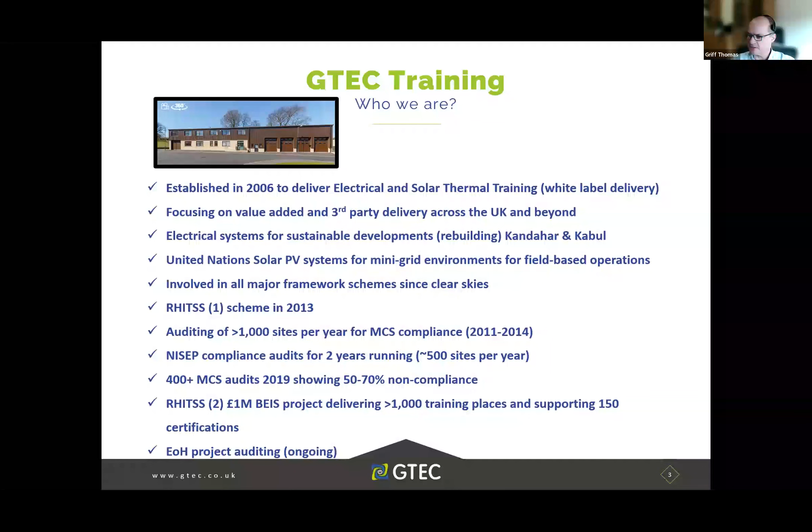And we've also been very heavily involved in standards and compliance. So pretty much all of the national standards that are used at the moment for the deployment of these technologies are those that I've either personally written or have been written by a group working alongside me. So the very first national standard for solar PV was one I produced in 2012 with a colleague up in Penrith. So we flew the Northern Flag all the way down to whatever it was, DTI, I think possibly then, or DECC.

We work very closely alongside government policy, government agencies, so we get a lot of good insights from that work as well. I'll let you read up and pick up on some of that stuff. Still very heavily involved in standards, and I sit on a couple of national and worldwide committees for solar PV and energy storage currently as well.

So what Kate asked me to do is to give a bit of a highlight over heat pump deployment challenges, etc. And it's actually a number that we don't hear a lot anymore, mainly, frankly, because Boris got a little bit embarrassed by it, but also because the new government hasn't quite decided if it's realistic. I can tell you now it's not, but bandied around a few years ago, there was a target of delivering 600,000 heat pump installs by 2028, which is just an absolutely colossal number of heat pump installs.

I don't quite know what everybody wants to know, so I've picked out a few key points from a few key areas and I'm happy to dive into that on Q&A afterwards. But what I wanted to highlight is this term rapid transition, which sounds really corporate, right? But we've done such a lot of this stuff over the years. Take inside toilets: in 1967, 25% of homes in the UK had no inside loo. Now, if there weren't two inside a property you're moving into, you'd be going, oh, there's only one toilet, and you'd be thinking about putting another one in.

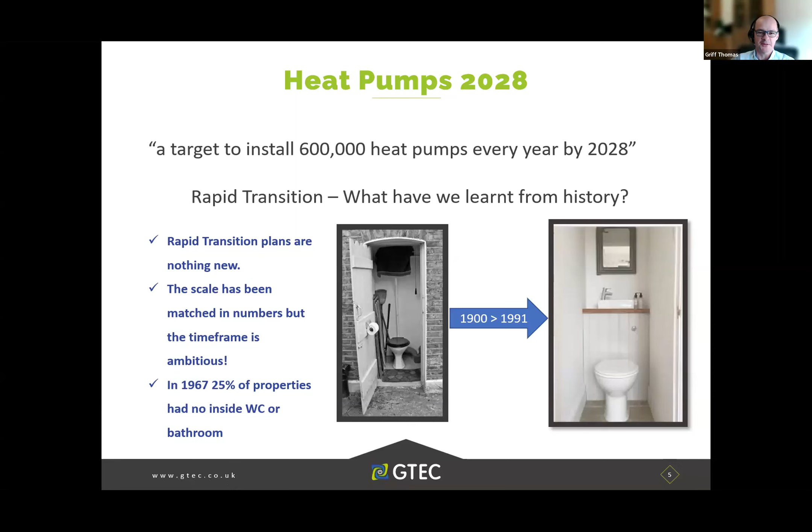So really interesting that we shouldn't categorize all this incredible amount of hard work we've got to do to get that consumer buy-in as though it's something that's never been done before. We have, and we've done it loads of times. We've just done it with different things. And that's a really important thing I want to sort of draw out.

So other examples, gas central heating. I can remember not having any gas central heating or any central heating at all, in fact. But again, nowadays we just expect it as a norm. And it's very much about looking at that, looking at fitted kitchens. We never used to have fitted kitchens, but now we expect it as a norm. And the summary of that is that our expectations, our demands, our consumer expectations of all sorts of things within the home have changed.

And nobody ever considers payback on those things, which really gets me, because loads of people talk, what's the payback on a heat pump? What's the payback on this? Well, it's a means of heating the home. I absolutely understand there's a big capital cost for most people, but again, we need to try and flip that mindset into a why wouldn't we instead of why would we? And that's a really difficult social challenge. I get that, but if we don't, it could be tricky.

And again, it's a social norm. Going back to 2010 and 2011, if you drove down the street and saw solar on the roof, you would probably stop and look up and go, oh, what's that eco bling on that roof? Whereas now it's everywhere all around the country, and we just accept it as a social norm, in the same way as if you flew over to Turkey or Spain and you see all the big solar thermal plants on top of the various buildings and blocks of flats out there. We just expect it's ordinary.

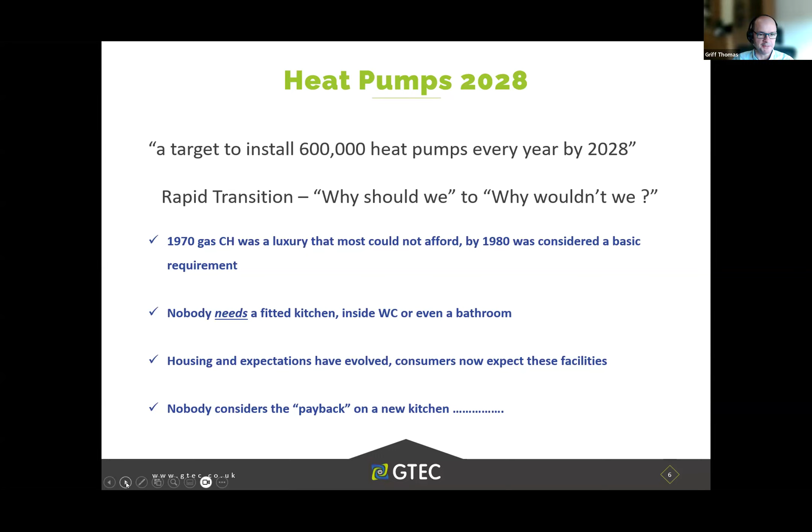And I guess one particularly for this group as well is about the visual impact of heat pumps, especially. And the bit that I always home in on is, do we remember when we didn't have 17,000 different types of recycling bins outside our doorsteps? Because that's a really big social change, to go from having one bin to having multiple. I don't know how many there are in your areas, but you'll certainly have 2 or 3, I would imagine, if not more. And having all of those stacked up outside the house, we've just become accustomed to, and that's our expectation. So yeah, the question is, why wouldn't we install a heat pump?

And I guess the most recent one that we all will be aware of is the transition to LED lighting, where 10 or 12 years ago, LEDs were very poor, they were very expensive, not a lot of people were using them. Whereas now you pretty much can't buy anything apart from an LED lamp. And that's a really rapid shift in 10 years practically. So we shouldn't be too upset that it's taking a little while to get to 600,000 heat pumps by 2028. That's not going to happen.

So think about it. Why wouldn't we have an inside loo? That's the sort of comparators we've got to give, and somebody's paying for that. Somebody pays to have the inside loo, directly or indirectly. When you buy a house, when you're retrofitting a home, somebody's physically chosen to do that. So a few little bits and pieces about the social challenges, because I thought that might be quite an interesting set of topics to go around.

There's a very common misconception, I feel, about heat pumps being noisy. I noted a few people, I think it was Frank, talking about oil in Hovingham. Almost every heat pump now available on the market, the terminal noise, that's the velocity noise that we hear from the fan moving, assuming it's been installed correctly, is actually technically less noise than a fan-assisted oil boiler flue, and probably less noise than an older conventional gas boiler flue. There's no other way of getting people to realize that without seeing it, feeling it, touching it, and actually getting in front of one while it's running.

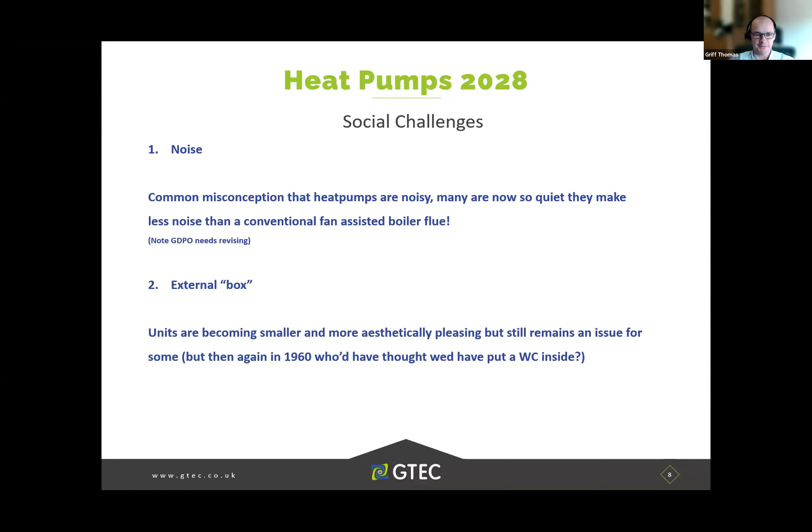External box, so that's a bit I touched on before about this aesthetic look. You know, again, going back 10, 15 years, they looked very, very box-shaped, weren't very nice looking. Yes, I also understand that some of the more modern units, if you look at the Octopus Cosy 6 unit that looks a little bit like a pink salt bin, that may not be for everybody, but manufacturers are working quite hard to make them look acceptable to people as well.

Well, one of the biggest things that we come across with social challenges is disruption during installation. A lot of people make inquiries about heat pumps. So we were involved in the Department of Energy's deployment under something called the Electrification of Heat program. So that was 750 heat pumps installed for free across England and Scotland, I think it was. And we audited 242 of those. The biggest cause of dropout for engagement were people who, when they had the survey around, realized that there'd likely be a number of disruptions to their home, swapping out radiators, swapping out pipework, etc.

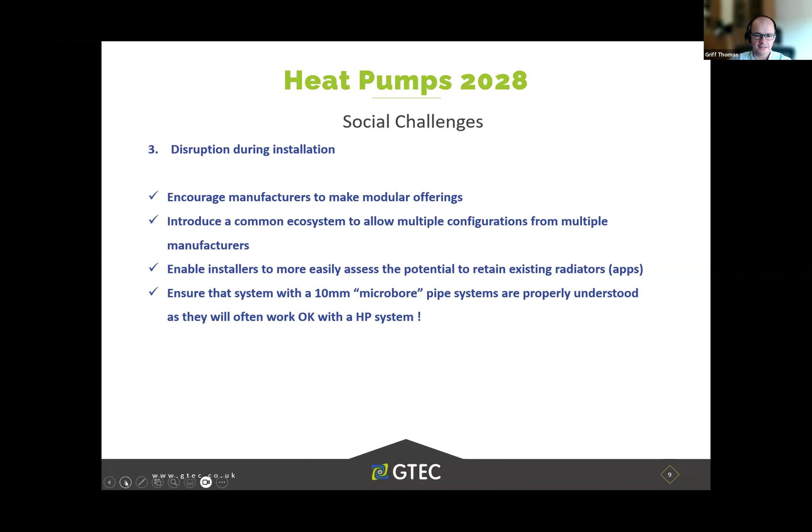Probably one for a deeper discussion, but I can absolutely categorically guarantee that the disruption that we are forced to accept at the moment is more down to the lack of technical ability of those doing the surveys and the designs of the systems, and wanting a very simple take-a-package-and-fit-it kind of approach, rather than doing some complicated maths to see what would work within the existing dwelling. So again, that's a time and education thing for the installers, the surveyors, the designers, but here at GTEC, we don't put that in a very high risk category at the moment, because we very much believe that will get flushed out in due course as people get better educated.

And then a little bit about how the heat pumps work. So I'm just going to throw this over mainly because if I keep talking like this, I'll run out. So does anybody just want to try and tell me what does a heat pump actually do? Anybody want to chip in? No. Nick's looking like he's leaning into the screen. I'm not looking for any complicated Carnot theory, mathematics or anything. Is it basically a fridge in reverse?

Yeah. Okay, so it's actually just a fridge, right? That's all it is. Forget the reverse bit. But the point to hone in on is that it does exactly what the name suggests, and it pumps heat. That's it. That's as much as you need to know and understand about it. It pumps heat from one place to another.

So taking the fridge example, I suspect, like me, some people on this call may be old enough to remember when you could see the sort of aluminium or stainless grill at the back of the fridge, actually inside the compartment. You don't tend to see them anymore. And then you've got the black grills at the back, which give off heat. That's a heat pump, right? So all it's doing is taking out the warmth from your sausage roll or whatever you put into that fridge, and it's absorbing it into that grill at the back, and it's pumping it out into the black grill at the very back of the heat pump.

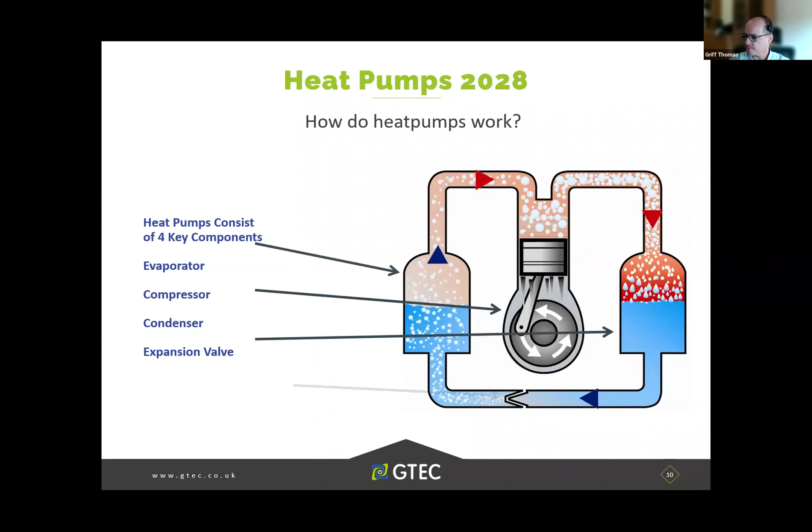So it is literally just pumping heat. What it looks like in a bit more detail is something like this. So we've got the compressor, which is that big black box. We've got low-grade heat coming in. Now, if that's ground source, that might come in from a loop of water going around the ground or in a vertical borehole. Or if it's air, it'll just be passed over the fins on the back of the heat pump.

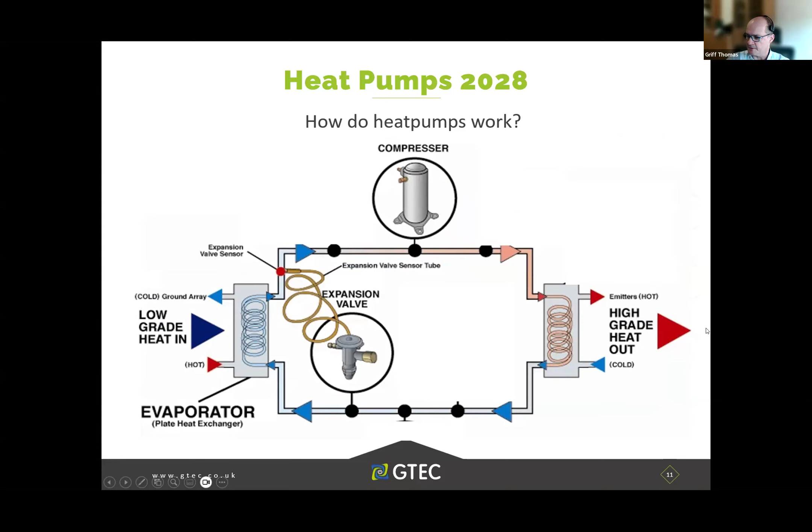And in there, that creates the boiling gas. The boiling gas now gets compressed. The compression goes over to this exchange part here, and that's when we go off to the emitters, the radiators, the underfloor in a home, and away we go. And it just carries on that cycle all day, every day. And that's sort of what it might look like in terms of a typical installation in a home.

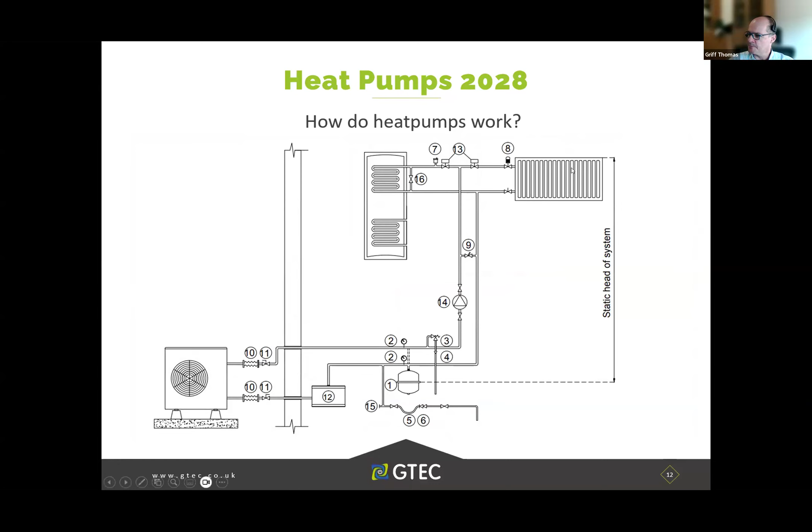And the bit that a lot of people get upset about, absolutely understandably, is the disruption around the pipework. You may be moving from a combi system onto having a cylinder, etc. We can't get away from some of that. Certainly the cylinder part, it's almost impossible to install a heat pump without requiring a cylinder. But there's a lot of work going on in radiators and piping to help get rid of that disruption.

And then another one, to kick some myths out, is the idea that radiators aren't really any good for heat pumps, which is completely fabricated. Again, it comes down to the maths, but there's a really interesting nuance that's happened over the last 20 years especially: when heating systems were originally sized and installed, you would end up with people who have the right size radiators, or actually usually slightly oversized.

And then as time's gone on and that home has become more energy efficient, so there's some insulation applied, maybe underfloor, maybe windows have been changed, maybe work done to seal up air gaps and drafts, what you find now is for a conventional fueled system, oil or gas, those radiators are far bigger than they need to be, and they'd work quite well with a heat pump.

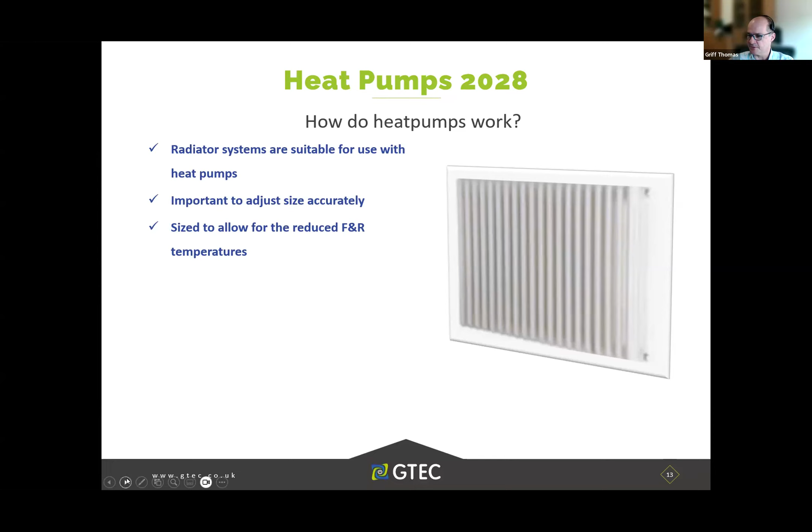But again, trying not to be too disingenuous to installers, that requires some maths, and a lot of them just prefer the option of coming along, replacing everything, and going from there, which isn't ideal for consumers, and we see probably a 70–75% dropout of consumers at that stage.

So then that moves us nicely into the technical challenges. And again, we're really blunt about this. There's no technical challenges at all.

I've designed systems with heat pumps that have gone into churches. Right? Churches aren't usually inherently the most insulated or airtight buildings, but absolutely anything is possible. But an interesting point here is about what we perceive to be efficient, because a lot of people talk about, is a heat pump efficient? Is it going to run efficiently? So I thought it'd be worthwhile just drilling into that a little bit.

And again, I don't know on the call whether anybody is sort of in this space, but is anybody able to guess a little bit about what the average efficiency is of a gas boiler? Anyone aware? 70%. 70 is, that's probably quite realistic, Chris. I'll be honest. Usually the government and co would have you believe it's kicking around 85–90%, but when you take into account how it's actually installed, yeah, 70–80% would be fairly average.

But what about a heat pump? And I'm talking about a really badly drop kicked on a Friday afternoon, no consideration to the customer installed heat pump. No, probably around about 300%. And in fact, the building regulations now require a minimum of 300% efficiency.

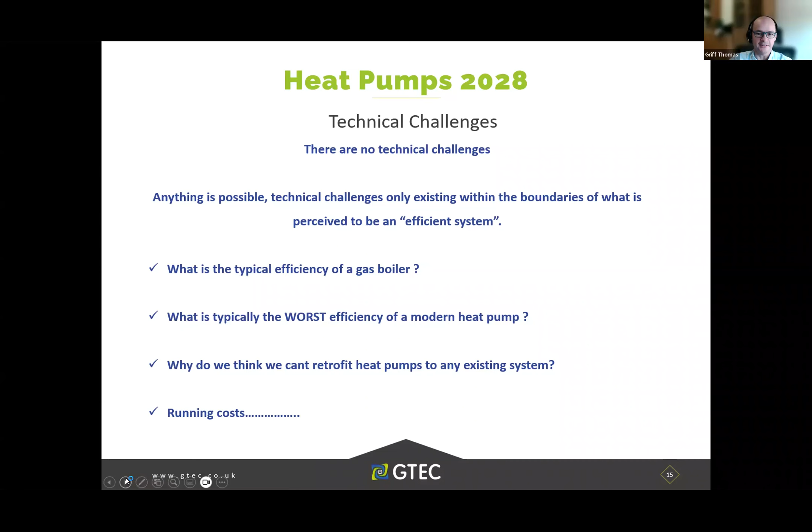No problem. So what we're actually talking about, quite rightly, is running costs, right? That's a kicker. So the other part is capex, or cost of the unit itself. And again, if you were to ask me to build a heat pump from scratch, I'd say give me 600 quid and I'll go and build you one, right? Because the constituent parts are not actually that expensive. Everybody's looking aghast there. I hope nobody's had a heat pump installed recently and has paid the market rate.

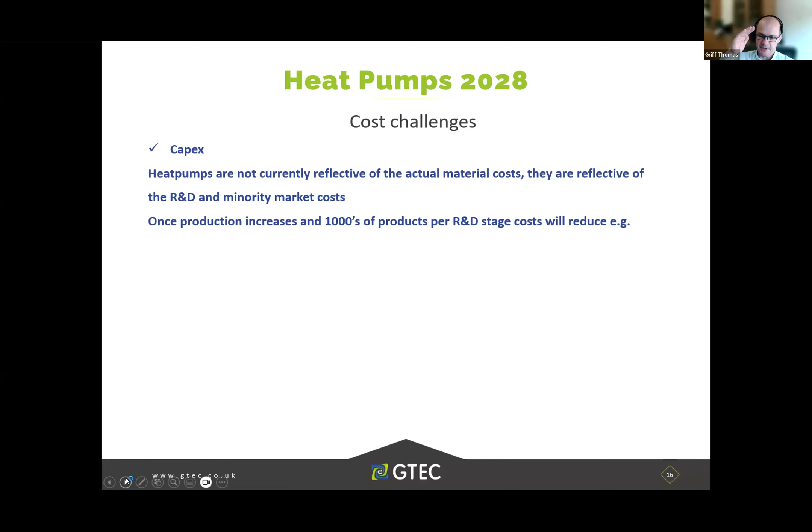Again, what we've got to remember is we are in heat pump world in an absolute tiny minority of the heating market in terms of what's getting installed, and the economies of scale are just nowhere near where they need to be to make it effective. And quite rightly, no matter what we might think about certain big corps, if they've spent 2, 3, 4, 5, 10 million on R&D on a product, building new production lines, shipping them, etc., they have to get that money back, or R&D will stop and we'll never get any products that are better. But we have to get to that pinnacle point where it starts dropping off.

But I just wanted to highlight that unit there, which is an air-to-air unit, right? So some of you may have these, some of you may have worked in offices that have had these.

It's a heat pump, and it's actually a heat pump that requires 2 boxes. Now, in my world, that means that I've got double the production line time to accommodate for. So if I've spent £1 million on my factory, and I've got 2 boxes coming off it, for one system, I'm getting 1 system per £1 million. Whereas with a heat pump, because both of those are in 1 box, it's 1 production line time. It's a lot cheaper to manufacture.

Pretty much we can swap out that unit there and say that that's the bit that exchanges the heat to water, and just look at the price. And this is an absolute random website. I don't have any special terms with them, and it's 1,600 quid for a 7 kilowatt peak system. Yeah, which hopefully reinforces the point about the cost of the parts.

What I can also tell you is I know some manufacturers of heat pumps that are grade A manufacturers that are landing their heat pumps in Hull at £1,200 per unit for a unit that will do the average 3-bed home. So there's also a supply chain discombobulation as well, and people making money in what's a minority market at the moment.

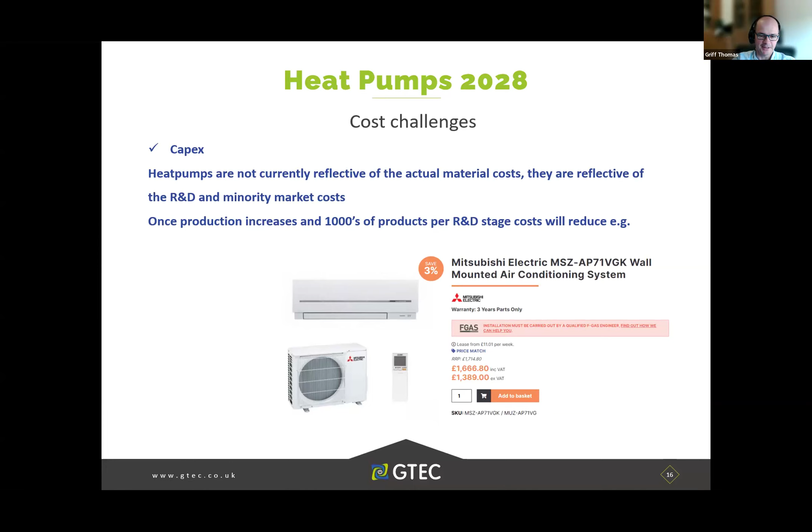Mark's grabbed a calculator. Oh no, there's going to be a tricky question coming in a minute.

And then just very briefly, moving on to the running costs. We've got to get to a point where the running costs are acceptable, and that means almost parity for people on the fuel they are trying to displace. So I've used some examples here of 6.5 pence for gas, 8 pence for oil. I totally understand that's quite sweeping because lots of people pay lots of different prices. That's not 8 pence per litre of oil, by the way, because those days have long gone. That's 8 pence per kilowatt hour delivered from the oil itself. There's some maths that goes into the back of that, which I can pick up with anybody if they desperately want to.

And again, in terms of tariffs, I'm sure people in this group are 100% aware there's a lot of very snappy, sexy, dynamic, time of use kind of tariffs going on at the moment. And I'm intimately aware of the colossal amount of work which really big corporates are doing in this space to give priority heat pump tariffs that mean that the running costs will equate to or be less than that of a conventional fuel. I absolutely have no doubt that that will come in very, very quickly. I'm aware of beta trials where they're doing that already.

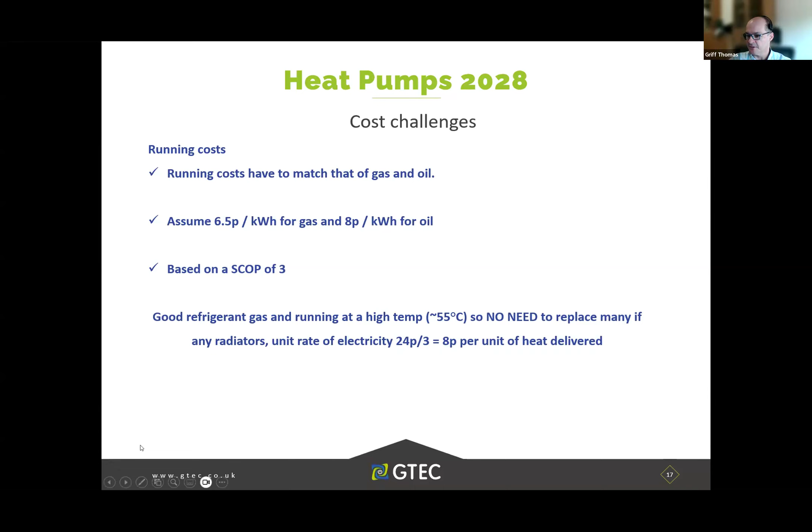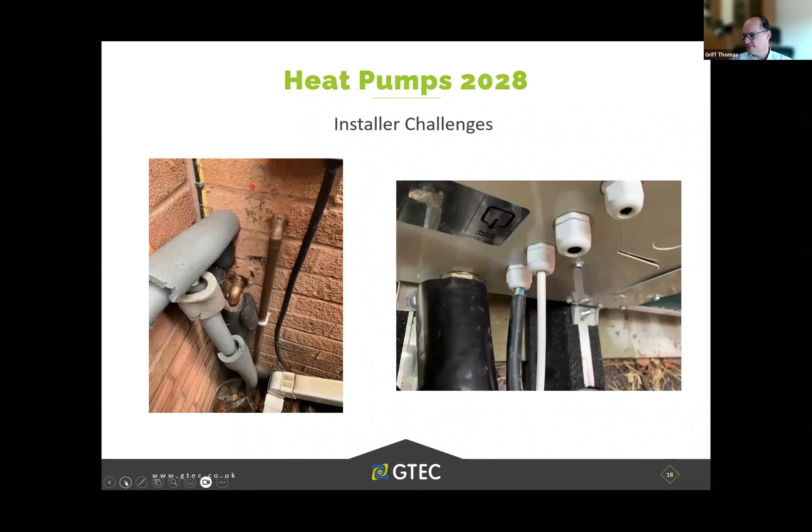That'd be great. I'm only just a little bit conscious of time. Oh, we're running over. Okay. Just to see if anyone's got any questions. But I don't know how much more you want to. You'll get the pictures afterwards, right? Oh, okay.

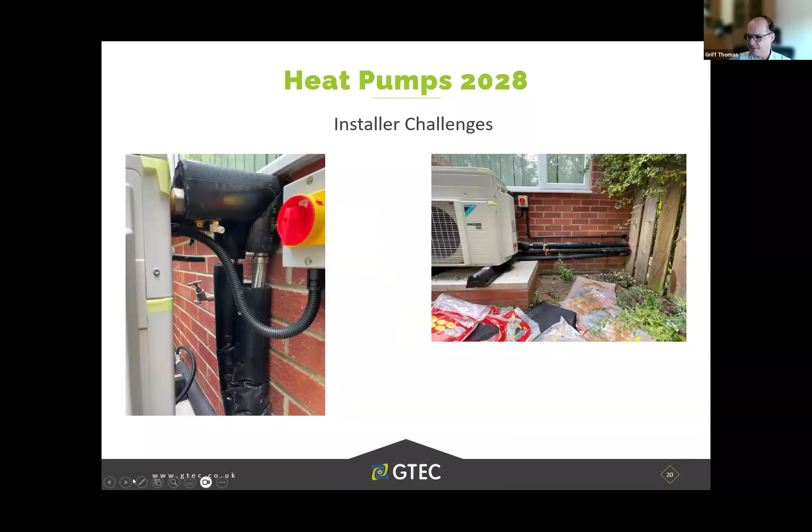Have a look through. There's some things to look out for, which I'm sure, you know, uncontinuous insulation, etc. Then please fire that off. And then it was a little bit about installer availability and consumer access to tools, etc.

What I'll finally wrap up with is, you've seen we've got a dedicated centre up in North Yorkshire. We are 100% open door to anybody who wants to come. So if anybody here wants to gather a group together, we've even built a house inside for people to come and have a look at for insulation. We've got solar PV, we've got energy storage, we've got heat pumps coming out of our ears.

We've even got some solar thermal, because I still love solar thermal from back in the day. And we're quite willing to do talks for people, etc., in a completely unbiased way. I understand what you said, Frank. I'm not doubting those people weren't unbiased, but if somebody's struggling to get hold of a presenter, then we're more than happy to do that. And I'll wrap it up there.

That's brilliant. Thanks so much, Griff. It's just really interesting to hear sort of a different side of heat pumps, and sometimes you hear all these myths and things. So I'll just see if anyone's got any questions for you. Anyone got any questions? Yes, great. Oh, no, that's one. Sorry, was that me, Kate? Yeah, go for it.

So what's got to change then, Griff, to make the uptake quicker? I mean, are you basically saying that it's government that's got to step in here? So I think what we have to be brutally honest about, and you alluded to it a little bit earlier, is what gets people involved, right? I've been doing this for 20 odd years, and like you say, it's the same faces. I go to events now all over the country, giving talks about this transition. What I see is a lot of very new faces. And honestly, the only reason why they're engaging is because there's a business case.